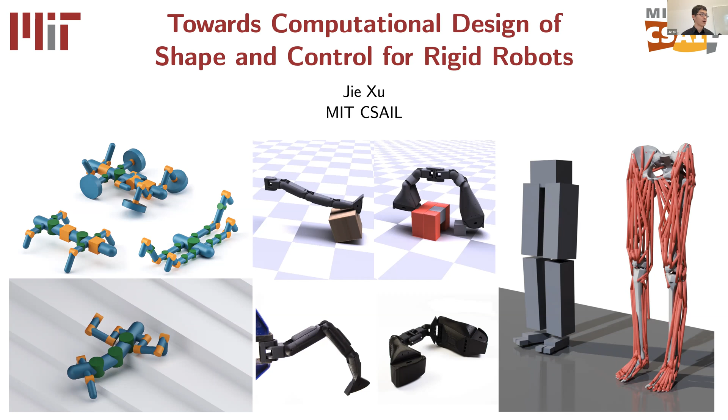So to motivate why we need to do some co-design of robots, let's first look at organisms in nature. Nature has evolved tons of creatures over tens of thousands of years to be so skillful for different tasks. To be successful in their special skills, every creature here has its own very special body mechanism to be able to complete different corresponding tasks easily.

And the same analogy happens to robots. Here are a few representative designs from terrestrial robots, manipulator robots, aerial vehicles, and underwater robots. It can be seen that those robot designs are very diverse and highly optimized for the specific tasks. Although a proper robot design is so crucial for task performance, designing and optimizing a robot is actually very, very challenging and time-consuming.

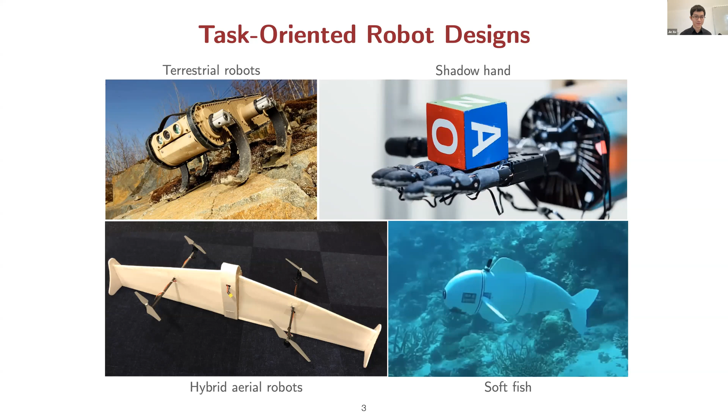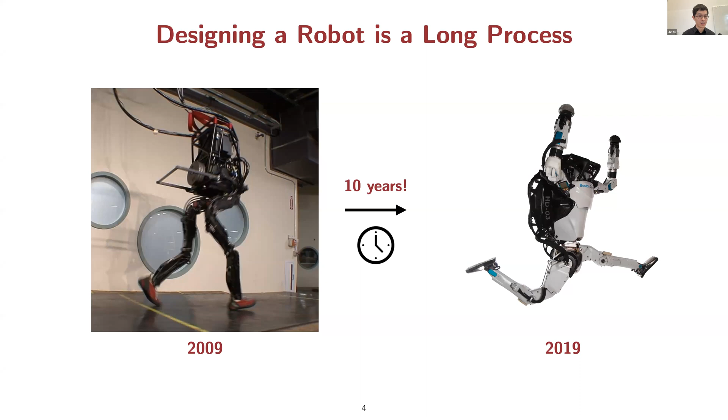For example, think of the Atlas humanoid robot from Boston Dynamics. It takes a genius team almost 10 years to evolve from the previous Petman version to the optimized Atlas model. So why is it so hard, and why does it take so long to evolve this model?

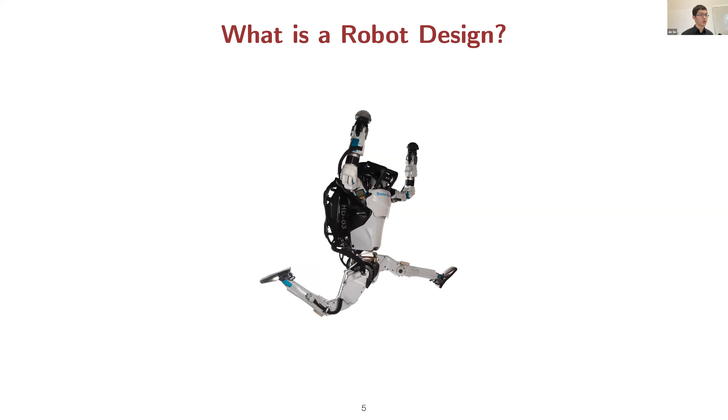So let's take a close look at what a robot design actually is. Or in other words, what are the components the designer should consider when designing a robot? Similar to nature's creatures, most robots are composed of two main components: the body and the brain. The brain is responsible for telling the robot how to make actions based on observations of the world. On the other side, the body is more complicated and corresponds to the robot hardware, including morphological shape, sensors, actuators, etc.

To simplify the problem a bit, in this thesis we consider the morphological shape as the main design variable in our robot co-design problems. However, even modeling the hardware shape only is complex enough. To specify the hardware shape, we need to decide on some discrete variables, such as the topology of the robot, the number of limbs, how those limbs connect to each other, and what type of joints are to be actuated. We also need to decide some continuous shape parameters, such as the size of each limb, the mass properties, and the frictional coefficients of each limb.

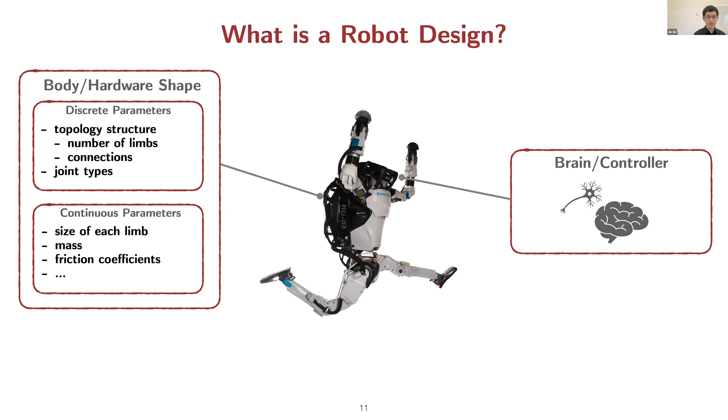So to design such a robot for given tasks, traditionally a robot expert needs to first empirically specify all of those shape and control variables.

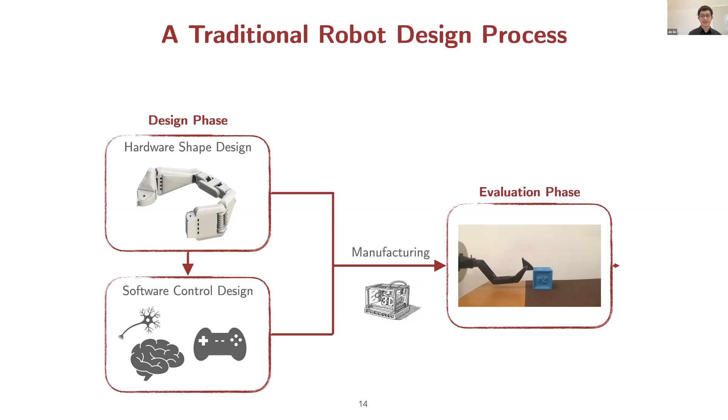Then it has to manufacture the design and evaluate the performance of the design in the real world. After that, based on the evaluation, she needs to come back to improve the design based on her personal experience. Each such manual design loop typically takes several days or even months.

A typical robot design process usually requires tens or even hundreds of such iterations before completion. Furthermore, the optimized robot design from this process highly relies on the expert's knowledge and can be limited by the expert's priors.

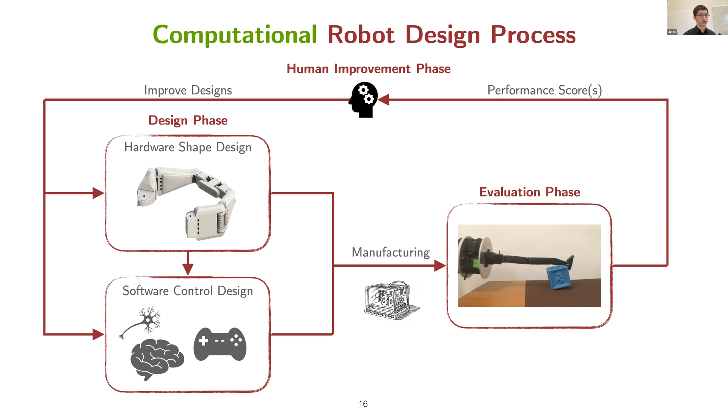Computational robot design tries to improve this process by minimizing human intervention in each stage. First, it replaces the manual design phase with a computational robot design representation so that we are able to numerically represent robots by a set of shape and control parameters.

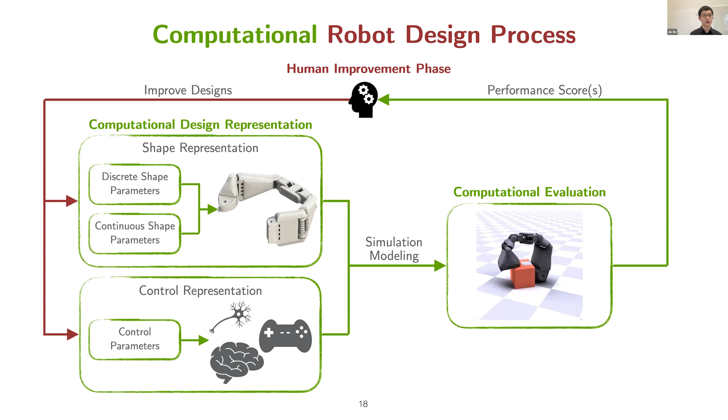Next, instead of manufacturing and evaluating the robot in real experiments, it computationally evaluates the robots inside digital simulators. And finally, and most importantly, the manual improvement phase will be replaced by a computational optimization algorithm to automatically improve the robot design parameters.

The replacement of these three stages successfully builds a fully automated and computational robot design process. To achieve this ultimate computational pipeline, we argue there are a few key challenges and several system design choices we have to tackle in each part.

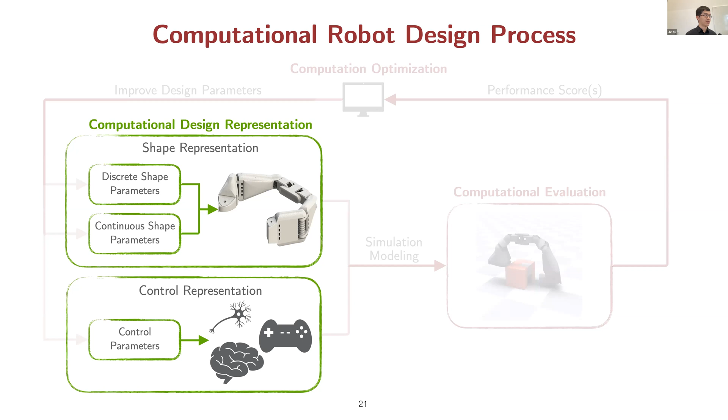Let's first start from the design representation part. The first question we encounter is: what's the best computational representation for the robot shape? Specifically, how to effectively represent the discrete topology, how to represent the continuous shape morphology, and how to represent both simultaneously are the very first challenges we have to deal with.

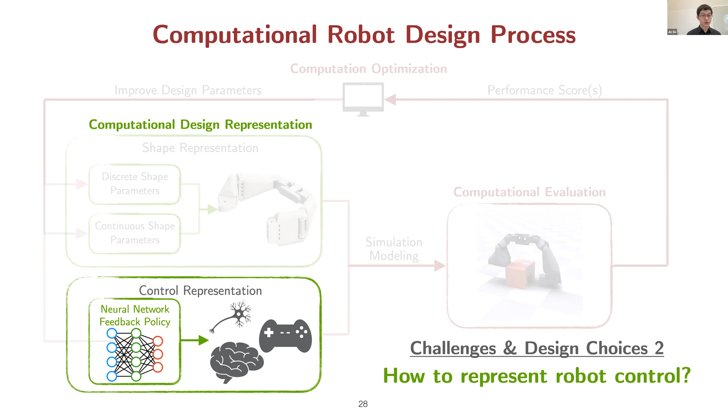The second design choice is how to represent the robot control. We have two options here as well: we can either use an open loop control sequence to represent the control, or use the more sophisticated neural network control policies as our control representation.

Next, in order to optimize for the robot designs, we need some performance metric to guide the optimization algorithms. An effective performance metric must reflect human subjective comparisons among different designs. We have two choices here as well: single objective metric or multi-objective metric.

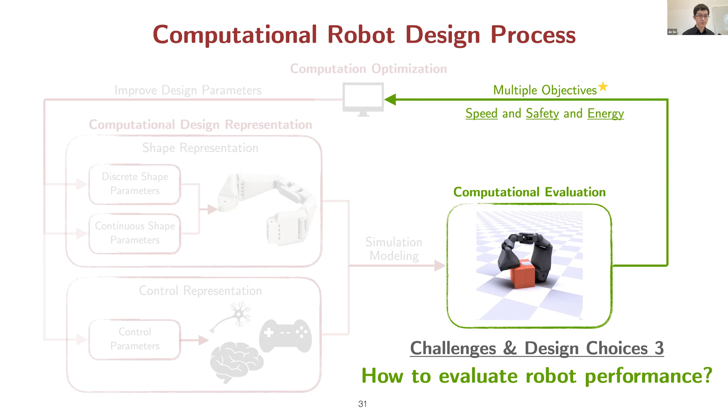While single objective representation is simple to start with, most tasks in the real world are evaluated by multiple criteria. Robots in real life are also usually optimized or designed for completing multiple different tasks instead of just one single task.

Once we have the proper robot representation and the task evaluation metric, the next and biggest challenge for us is how to optimize the robot design parameters to maximize its evaluation metric. There are a lot of interesting and challenging optimization problems to be solved here.

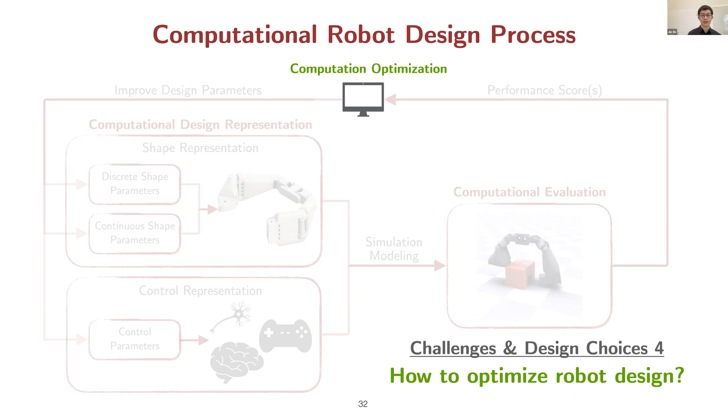First, within the single objective scope, we need to consider whether we want to just optimize for the robot control with the robot shape fixed, or improve the robot shape and control simultaneously. For the shape part, the optimization problem can also be very different depending on which parts of the robot shape are to be optimized.

And then all of those optimization problems happen again for the multi-objective case as well. As we can see, there are so many interesting challenges and problems throughout the whole computational robot design pipeline.

In my thesis, we try to contribute a small piece toward this ultimate goal by proposing our solutions to some key challenges we have identified here.

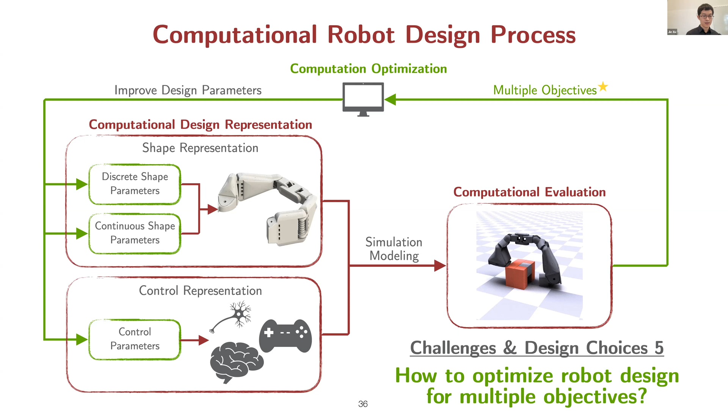In the first part of this presentation, I will introduce how we represent the discrete topology and the continuous morphology of a robot. Then in the second part, I will present in detail how we handle the single objective robot optimization for control problems with the fixed robot shape.

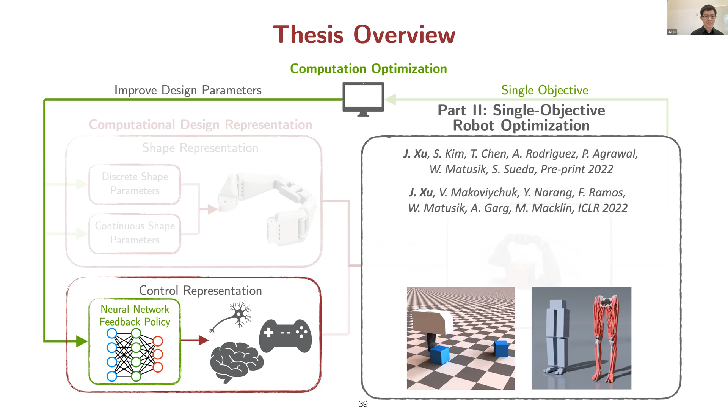And how we do the co-optimization for both the robot continuous shape parameters and the control, and how we further co-optimize for the robot discrete topology along with its control strategy. In the final part of this presentation, I'll briefly show our efforts on multi-objective robot optimization problems.

Okay, now let's get started for the first part, the robot shape representation. To computationally optimize the robots, the first problem we need to address is to represent a robot in a computational way. To be noted, I will probably use the words parameterization and representation interchangeably during my talk.

So what's a good robot shape representation? An ideal shape representation should result in a compact parameter set while also being able to express tons of different designs. It should also work for articulated robot designs with complex geometries, and it should always produce valid designs that can be easily manufactured. More importantly, the representation should be amenable to efficient optimization algorithms.

We propose different representations for robot discrete topology and continuous morphology, and I will take the manipulator design as an example to illustrate our solutions. So I'll first present our continuous shape morphology representation with the topology of the manipulator fixed. This is part of our RSS 2021 paper.

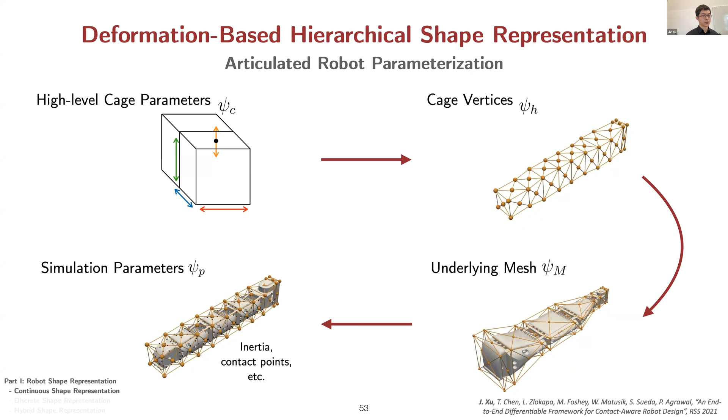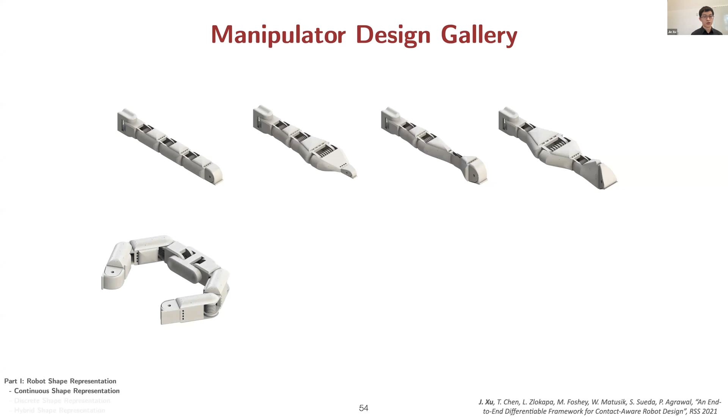Here we show two examples of applying our deformation-based representation. First is a single finger model, shown here in its rest shape. We parameterize it with our approach and randomly sample the cage parameters to produce several variations of it. As we can see, the generated designs successfully keep the connectivity while also preserving the geometry feature of the design. Here is another example, a two-finger robot manipulator, with its variations produced by our parameterization. We further validate the manufacturability of the produced designs by 3D printing each component and assembling them together.

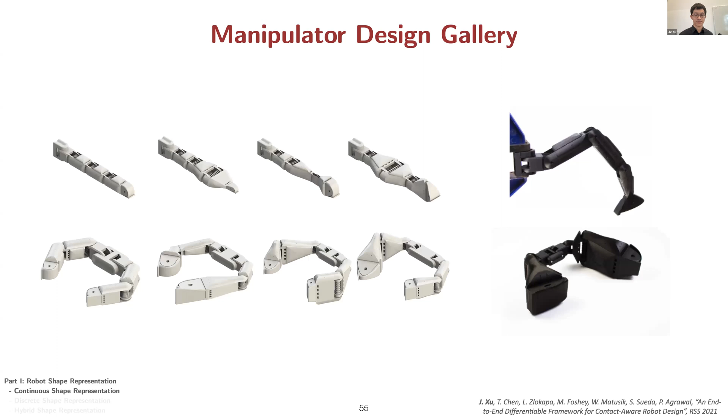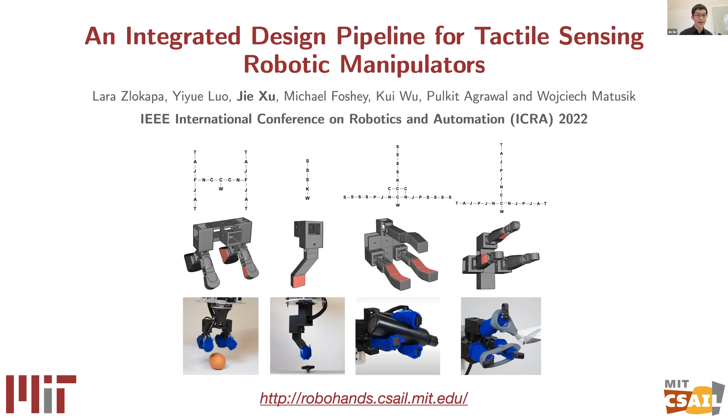Now that we have shown our representation for continuous shape parameters, next I will present how we represent the discrete topology of a robot. This is part of our work presented at this year's ICRA. With our approach, we are able to generate many different and valid manipulator designs very easily, and our approach starts with using a graph representation for each robot's topological structure.

Simply speaking, we can convert any robot structure into a graph. Each graph node here corresponds to a component of the robot, and each graph edge corresponds to a physical connection between two adjacent robot components.

While we can easily convert a robot structure into a graph, the reverse conversion is not necessarily valid. This is because if we arbitrarily construct a graph, it can result in an invalid design. For example, two adjacent graph nodes might not be physically compatible for connection in the real world. Thus, we cannot directly treat the graph as our representation for the optimization problem, since the optimized graph might be an invalid robot design. Therefore, it requires us to further invent ways to constrain the graph space to be valid.

And we achieve this by graph grammar. Specifically, a graph grammar includes a set of robot graph generation rules. Each rule either expands a non-terminal assembly node into a subgraph or replaces a non-terminal node with a realizable part to finalize the design. And the grammar rules are built in a way to satisfy the manufacturing constraints.

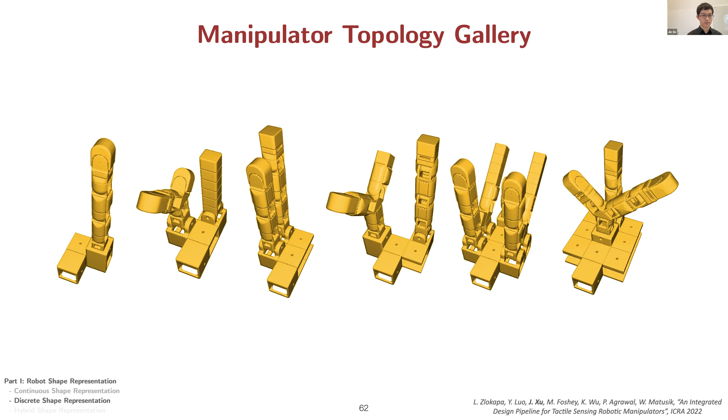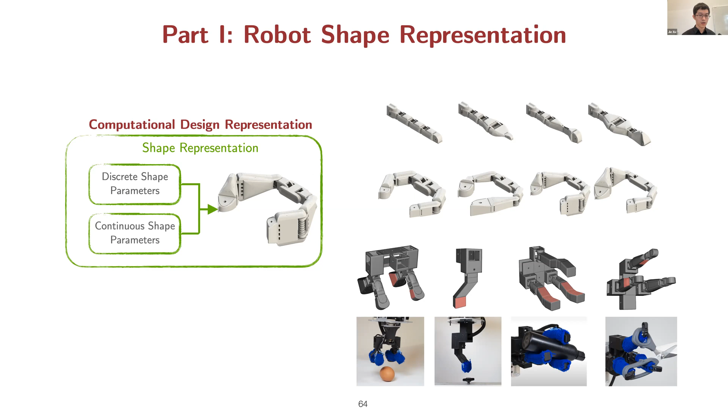We have shown how to represent the continuous shape parameters and how to represent the discrete shape topology of a robot. Now, if we combine these two representations together, we can successfully represent any discrete and continuous part of a robot shape. Specifically, we built a two-stage hybrid representation for robot design.

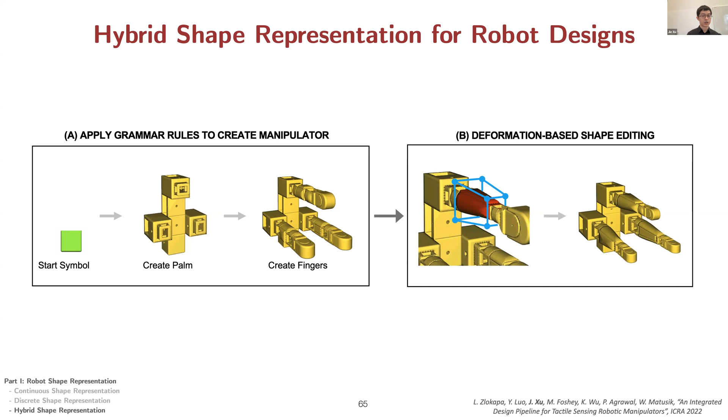In the first stage, the graph grammar rules are applied to construct the topological structure of the robot. Once the topology is determined for the manipulator, the representation process then enters the second stage, where the deformation-based representation works to determine the continuous morphology of each manipulator component. Here is an example.

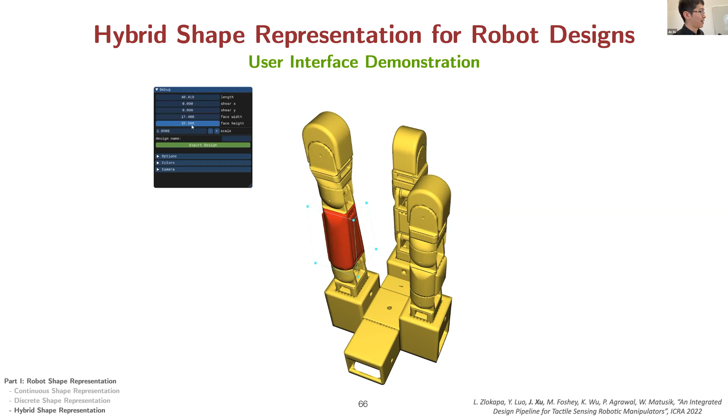We built a manipulator user design interface to demonstrate our hybrid representation. It will start from the palm grammar to construct some palm structure. Then once it's finished, it goes to the finger grammar to apply some rules to generate the finger structures and topologies. Once the whole topology of the hand is finished, we enter the deformation-based representation part to change the morphology shape of each individual component by cage-based deformation. So that's the whole process of how we build a manipulator from our interface and our representation.

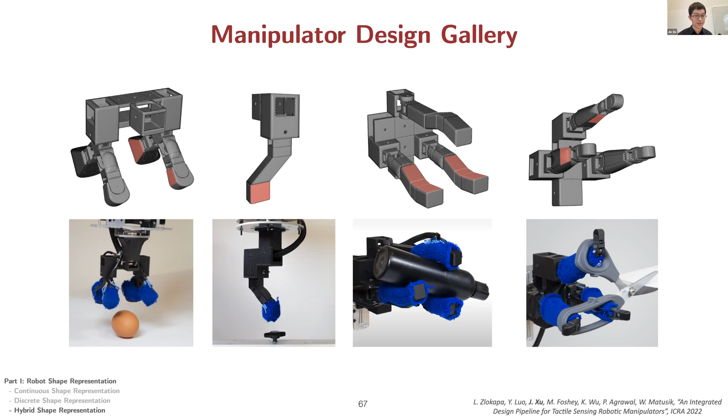Here are some manipulator designs built from our user interface, and all of them can be successfully manufactured and perform tasks in the real world. The blue covers here are knitted tactile sensors we put onto the manipulators.

In summary, to represent the shape of a robot, we use a sequence of grammar rules to parameterize its discrete topology, and then we use a set of cage parameters to parameterize its continuous shape morphology. Now we have our computational representation of our robots. The next question is how to leverage those representations to do robot optimization.

We will first focus on the single objective robot optimization problems. To optimize a robot, we have different options. We can either optimize its control only, as most robotics people do, or we can co-optimize its shape and control together. We will first delve into the problem of control optimization with the topology and morphology of the design fixed. Specifically, given a task and the fixed robot topology and morphology, we are interested in how to optimize a neural network control policy for this robot, for the given task.

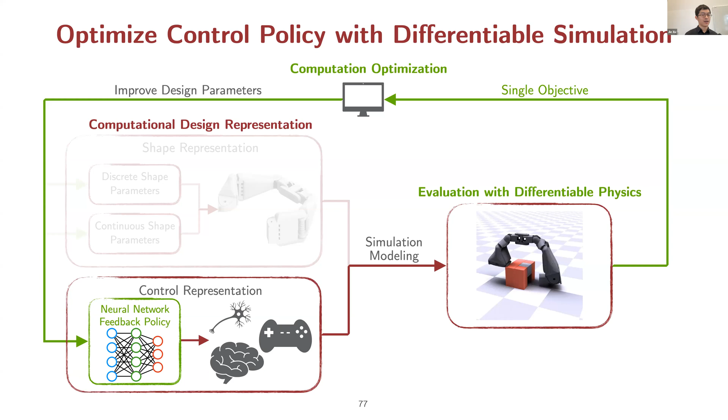As we know, reinforcement learning has shown to be a very successful tool for policy learning on many complex problems, such as in-hand manipulation tasks and humanoid character control tasks. However, reinforcement learning typically requires large amounts of samples, especially for high-dimensional problems, and it makes the learning very expensive and time-consuming. In this thesis, we argue that a differentiable physics simulation can significantly help improve the learning efficiency of the control policies. So what's a differentiable physics simulation?

Before talking about the differentiable simulation, let's first talk about what is a simulation.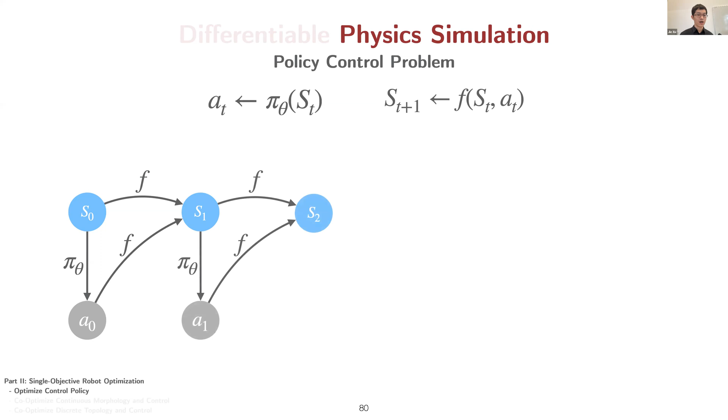Once the policy generates the action command, the simulator will execute this action and predict the new robot state according to the physics law. The simulation and the policy repeat this process for each time step until it reaches the end of the task. Then a task-related objective function is defined as a function of the states and actions to evaluate the performance of the policy. Our goal is to optimize the policy parameter theta to minimize or maximize this policy loss function.

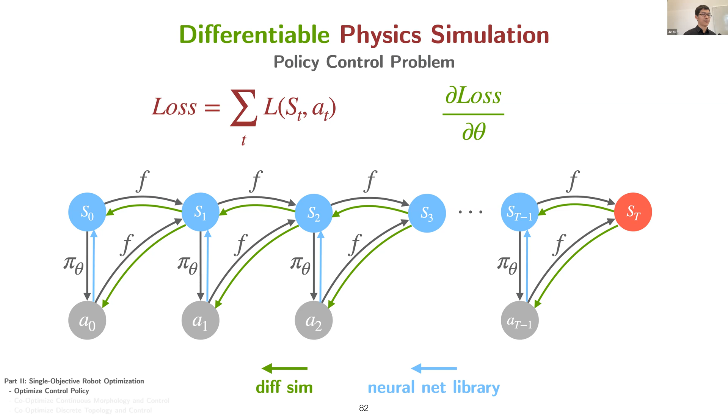That's what we typically do with a traditional physics simulation. A differentiable physics simulation will not only do this forward simulation path, but also compute the backward gradients. Specifically, it can pass backward the gradients of each simulation step throughout the whole trajectory and obtain the analytical gradients of the objective loss with respect to the policy parameters. You can think of each simulation step F as a layer of a neural network where the gradient function is customized by our differentiable physics simulation. Once we have partial loss, partial theta computed, we can apply any numerical gradient-based optimizer to optimize for the policy parameter theta.

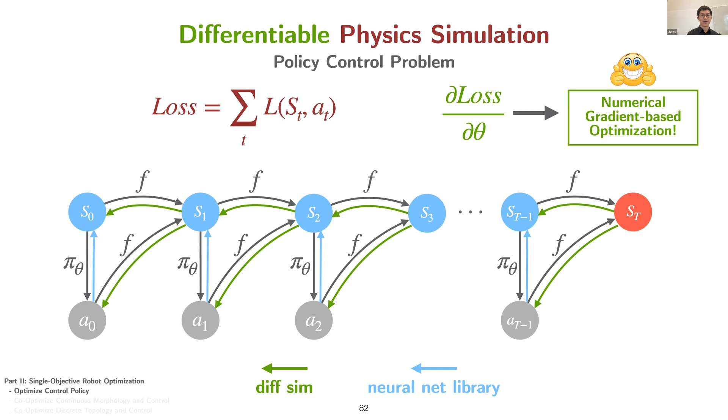In this task, a WSG50 gripper is equipped with a GelSlim sensor at the fingertip, and the task of the gripper is to push the box to a random goal location and orientation. To increase the difficulty, the box location is randomly initialized, and a random external force is applied to the box at each time step. The input observation of the policy includes the state information of the gripper, the goal location and orientation of the box, and the tactile sensor readings. Note that no box state information is observed by the policy.

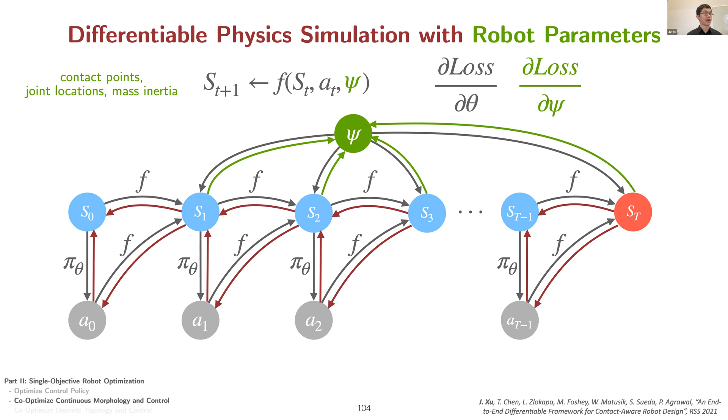Similarly, when deriving the simulation gradients, we can derive the gradients of the objective loss with respect to both the control parameters as well as the robot physics parameters. The computed gradients can then assist us to optimize the robot shape with gradient-based optimization easily. So with this high-level idea, let's go into this diagram again.

Suppose now we have a differentiable physics simulation with gradients to all the robot physics parameters and control parameters. We still have one thing missing: the differentiable conversion from the shape parameters in the optimization to those simulation-related robot physics parameters. Fortunately, that's exactly the continuous shape morphology representation we discussed earlier in this presentation.

Here we build an end-to-end differentiable framework for robot co-design. Given a fixed robot topology, the framework starts with a hierarchical deformation-based parameterization for the robot morphology. We use a set of high-level cage parameters to control all the simulation-related kinematics and dynamics parameters of the robots. Then the differentiable simulation takes the control parameters and the converted simulation parameters as input and evaluates the performance. The differentiability of each step allows us to backpropagate the gradients of the loss through the whole pipeline to the morphology and control parameters, enabling efficient gradient-based optimization for robot co-design.

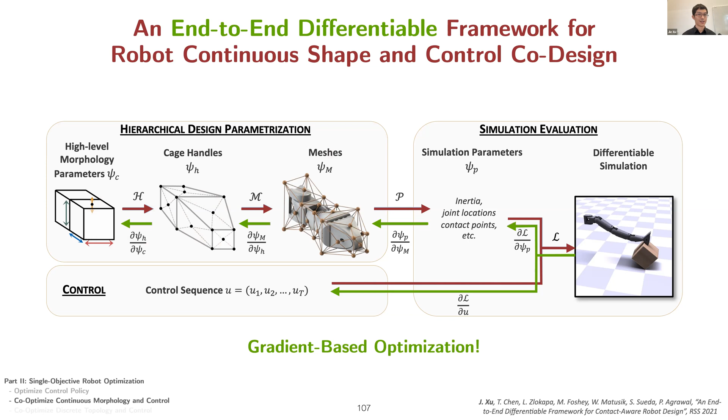We test the efficiency of our framework on 4 co-design tasks: the finger reach, the flip box, rotate cube, and assemble task. I'll introduce 2 of them here in detail.

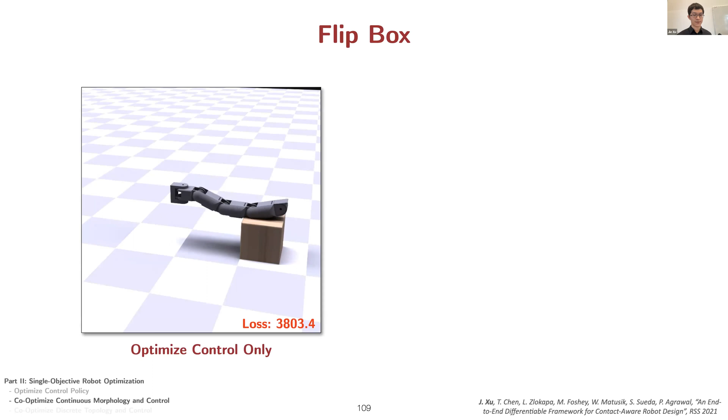In the first task, the finger is required to flip a heavy box. The video on the left shows that it's insufficient to only optimize for control. By co-optimizing the shape and control together, an interesting hook-like structure evolves to hook onto the back surface of the box to flip it over more easily.

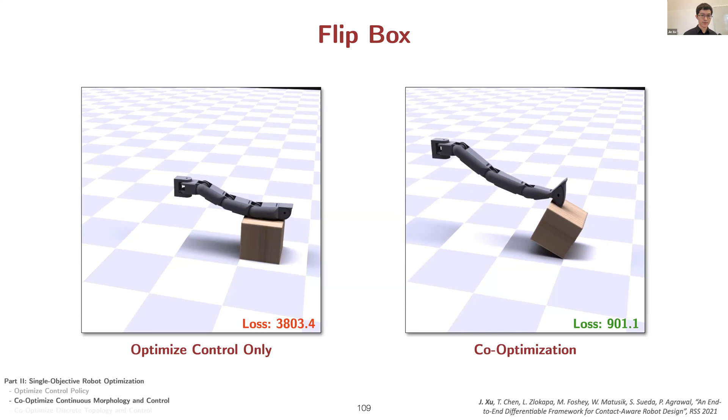We compare our method to gradient-free methods such as CMA-ES, 1+1-ES, and a reinforcement learning-based approach. The results show that our method is able to find better morphology and control combinations while only using 10 to 20 times fewer simulation iterations.

The next task requires 2 fingers to collaborate together to accomplish an assembling job. The optimized morphology has a longer right finger and shorter left finger to be able to reach the 2 objects of different sizes. Furthermore, the large and flat fingertip helps to push the cube more stably than a thin and curved fingertip.

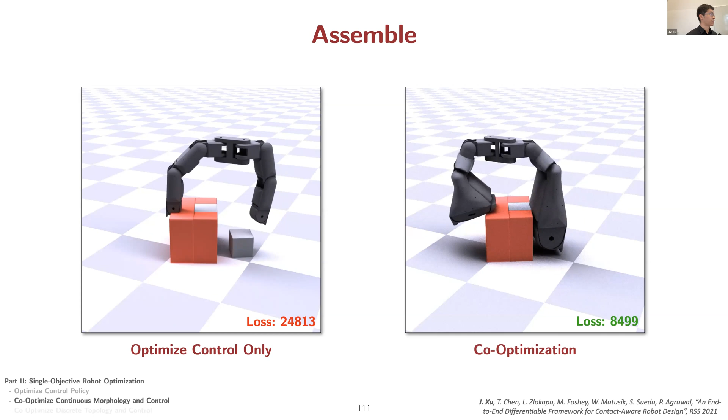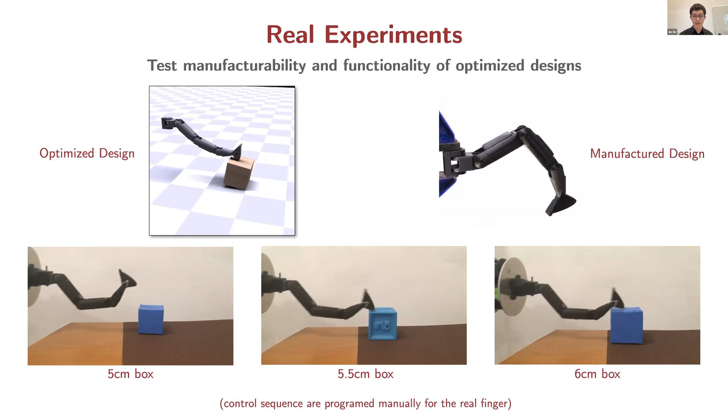We further test the manufacturability and functionality of the optimized design for the flipping box task in real-world experiments. We conducted stress tests on cubes of different sizes to test its functionality and robustness, and the experiment shows that the manufactured fingers can successfully flip the cubes in the real world.

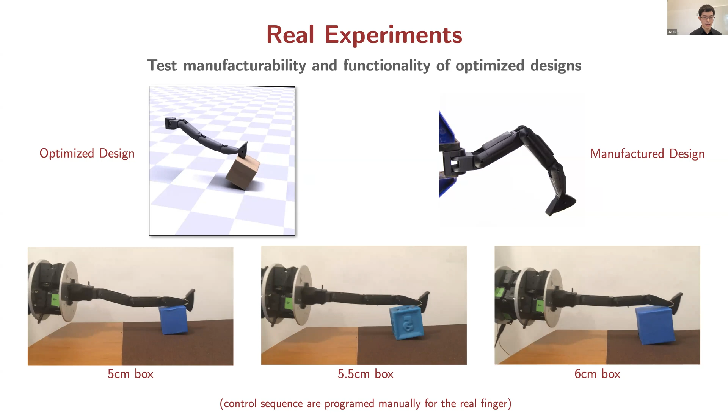In conclusion, in this work we present a numerical optimization method for co-designing the continuous shape parameters and control of a robot. This numerical optimization is computationally efficient since it highly exploits the underlying parameterization and dynamics model provided by our end-to-end differentiable framework.

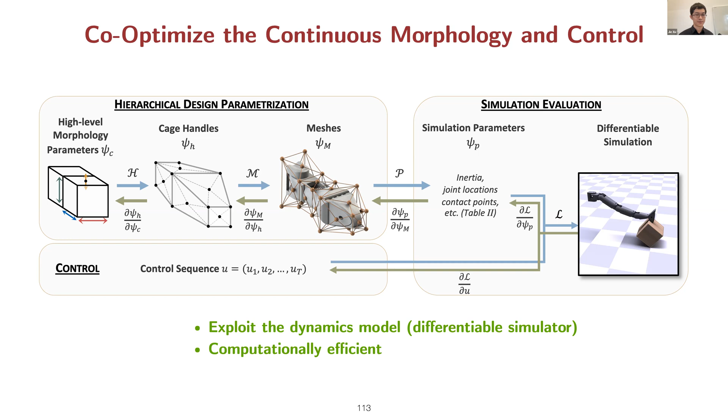We have now shown that differentiable physics simulation can help us co-optimize the control parameters and continuous shape parameters. But how about for discrete shape parameters?

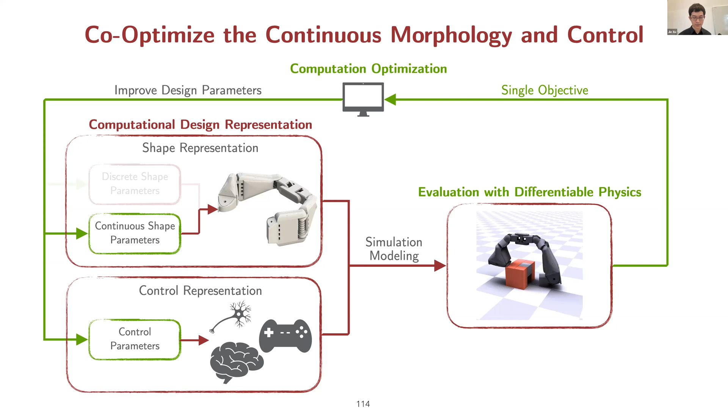Unfortunately, the inherent limitation of the numerical gradient-based approach is that it requires the optimization variables to be continuous. A simple illustrative example is that if we change the topology of the manipulator, the number of control degrees of freedom changes, so we can no longer have a fixed number of control variables to be optimized by our optimizer.

Next, let me show how we solve this challenging discrete optimization problem by leveraging some machine learning techniques. Our algorithm is part of the work presented in SIGGRAPH Asia 2020, and we use the terrestrial robot design problem as an example to demonstrate our method.

In this task, we use a graph grammar-based representation I introduced earlier. To recap: we use a graph to represent each terrestrial robot design, where each graph node corresponds to a component and each graph edge corresponds to a physical connection between two components. We use graph grammar to represent the valid robot design space, and starting from a non-terminal node, we can apply different grammar rule sequences to obtain different valid robot designs.

However, the grammar design space provides an extremely large combinatorial search space for the searching algorithm, making it very challenging to invent an algorithm for it. So how do we do the search? To illustrate the high-level idea, let's first take a look at the grammar search space. For simplicity, we can think of the search space as a tree-like structure, where each dashed node inside the tree represents a partial design, and each leaf node represents a final complete design.

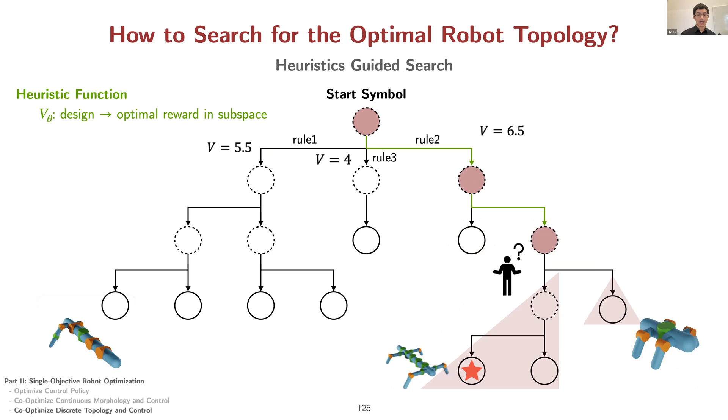That's the highest score among the 3 applicable rules at the first step, so we select rule 2 at this step, and then we follow the heuristic function again in each step until we reach the optimal leaf node.

So that's the high-level idea. Based on this high-level idea, we introduced our graph heuristic search algorithm here.

In each iteration, the algorithm starts from the design phase. In this phase, the algorithm tries to search for the optimal robot design in the grammar space, and at each step it uses a learned heuristic function to predict the value of each branch.

The heuristic function is modeled by a graph neural network, which takes a complete or incomplete design as input and predicts the values, and predicts the best optimal design in the selected sub-branch in this search space.

The searching direction is then guided by the predicted value of the graph grammar, and it runs in an epsilon-greedy strategy, going from top to down until we find a final design.

After sampling a design, the algorithm enters the evaluation phase to evaluate the performance of the sampled robots in simulation through model predictive control.

The design and its performance score are added to the design buffer. Finally, this loop concludes with a learning phase to improve the heuristic function from the collected data in the design buffer, using all the data to improve our heuristic function in each iteration.

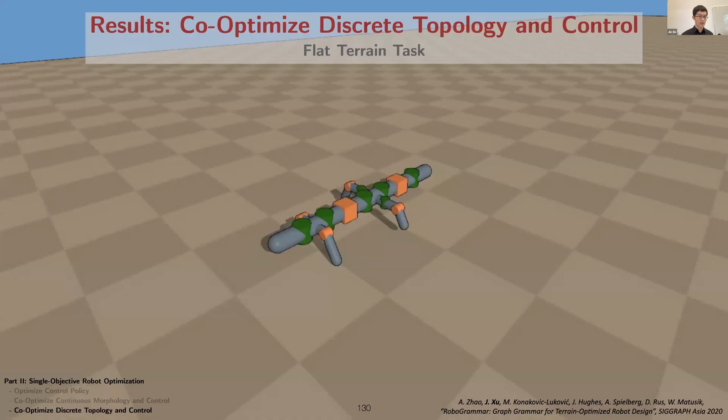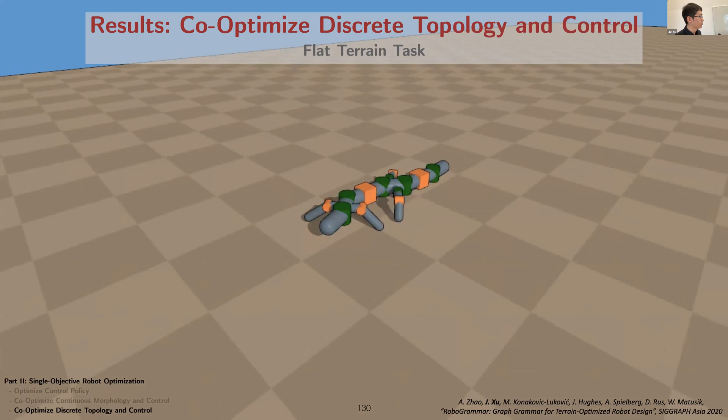Now let's see some cool results. Here is a robot optimized for the flat terrain task. In this task, one successful strategy is to place the limbs far from each other on the body and give them a full range of motion to move it very fast forward.

Here is the robot optimized for the climbing task, to climb a stair terrain. The optimal design has two strong front legs to help it climb easily.

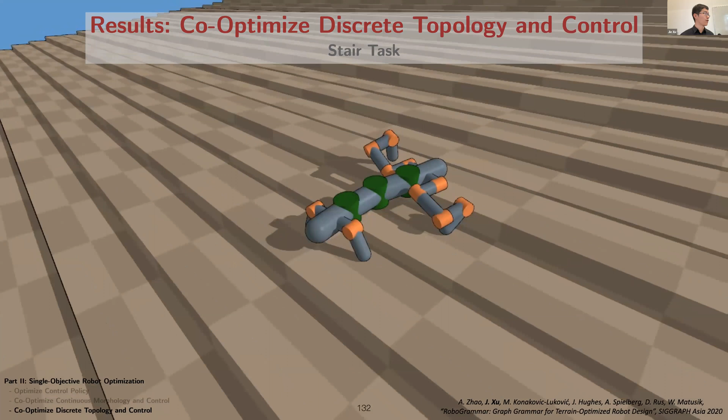There was no prior input to this search algorithm.

The secret sauce behind the graph heuristic search is twofold. First, we leverage the generalizability of the learned heuristic function to generalize the information we collected from the explored branch to predict the performance of the unexplored branch.

Second, as the search proceeds, the searching algorithm samples more and more designs, which helps us refine the graph heuristic function better.

And in turn, the improved graph search, the improved heuristic function helps the searching algorithm find better designs. So these two parts actually improve each other iteratively in each iteration.

Okay, so we have discussed our techniques for solving the single objective robot optimization problems. Now let's move on to the problems with multiple objectives. Due to time limit, I will very briefly introduce our high-level ideas of each project and demonstrate the experimental results. And I'm happy to chat offline if you are interested in the more technical details.

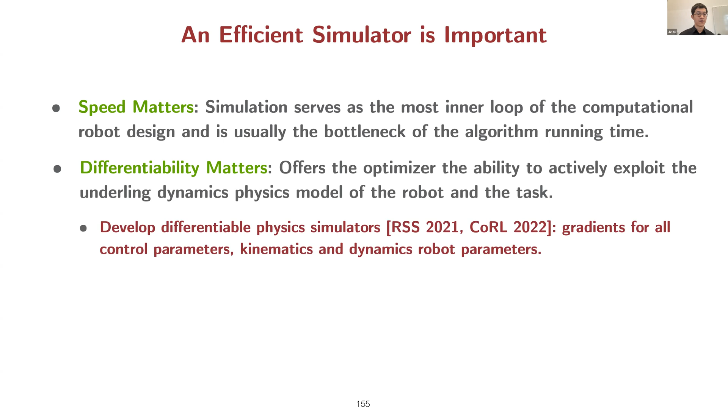Second, a good simulator can offer not only passive evaluation of the robot, but should also offer the ability to actively exploit the underlying dynamics model of the robot and the task. Inspired by this, we developed a differentiable physics simulator that can provide analytical gradients for all the robot control and physics parameters.

To achieve optimal performance of a robot, we can optimize different aspects of the robot design. For example, we can optimize only the control for robots, or co-optimize its continuous shape and control together, or we can also optimize the discrete shape topology and control strategy together. Different combinations require different optimization techniques.

We have demonstrated solutions for each of those combinations. A good takeaway from this thesis is that while numerical gradient-based optimizers can improve the optimization efficiency of continuous robot variables, learning-based approaches might become necessary when more complex and discrete variables are involved.

Although I have demonstrated algorithms for either optimizing control or co-optimizing robot shape and control, there is still a missing all-in-one optimization algorithm over all shape and control variables. Ideally, we should have a co-optimization algorithm to jointly optimize for discrete shape topology, continuous shape parameters, and feedback control policy for a robot in one pass.

We have some preliminary attempts along this direction. However, the current algorithms are only demonstrated on single rigid body systems without any contact with the environment. Those examples are drones and unmanned underwater vehicles.

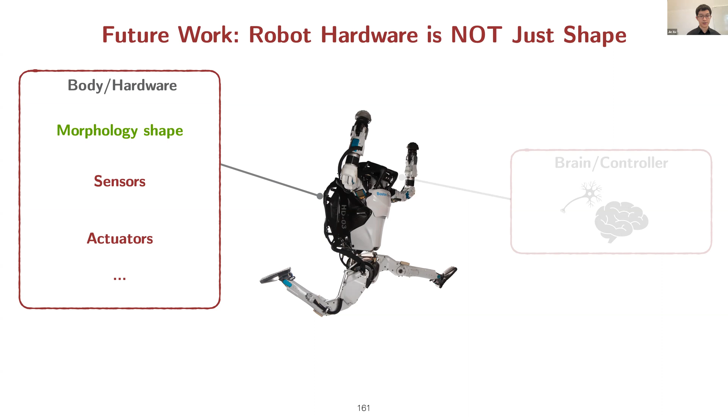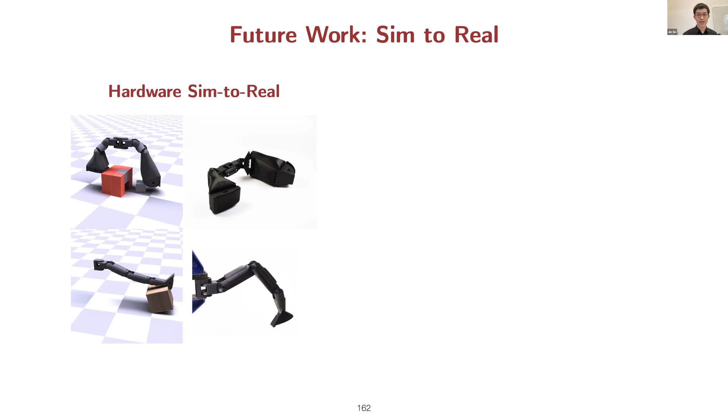Computational robot design cannot claim success without the success of sim-to-real. In my mind, there are two types of sim-to-real we need to satisfy. First is hardware sim-to-real, which means the optimized robot design must be able to be manufactured. We address this by effectively constraining the robot design space through proper robot design representations.

The second is control sim-to-real, which comes from the dynamics mismatch between the real world and simulation. There has been a lot of effort in the robotics field to narrow down this sim-to-real gap.

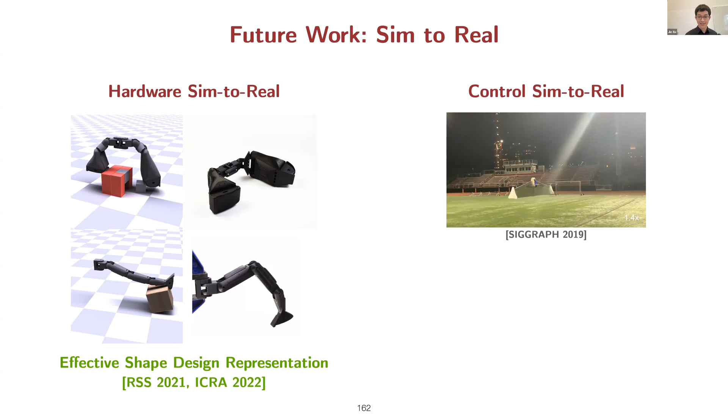I also had some preliminary attempts on sim-to-real for hybrid UAV, as mentioned by Wojtek before, and some attempts on sim-to-real for tactile-based manipulation control in a recent submission. However, the current techniques are still quite limited and highly problem-specific, and far from satisfying the needs of a general-purpose computational robot design pipeline.

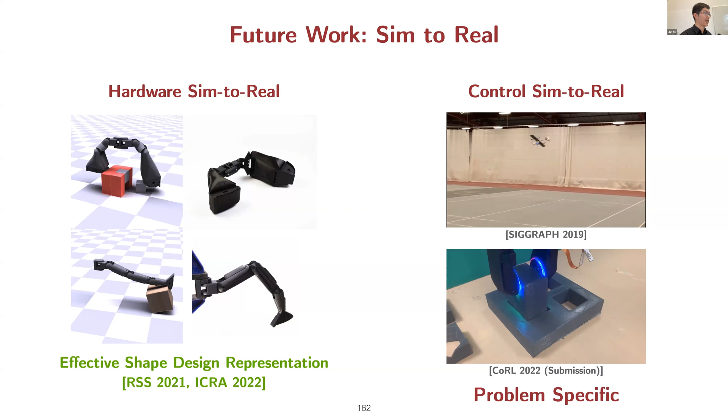So this concludes the technical part of my presentation.

Next, please allow me to spend a few minutes making some acknowledgements to the people who helped me during my PhD journey. First and foremost, I'd like to thank my advisor, Wojtek. Thank you for offering me this very special journey ticket to MIT and always encouraging me to conduct impactful research and to get distracted from those low-hanging fruits.

I also thank Wojtek for his extreme patience and tolerance in my very first leading project at MIT, which took me almost two years to complete. That was my first attempt to get into the robotics field, and I went through many different detours and failures in that project. Without Wojtek's patience and encouragement, I might have already given up and never knocked on the door of robotics again.

I would also like to thank the other professors on my thesis committee.

Many projects presented today could not have happened without help from Daniela and Pulkit. I thank Daniela for always sharing her broad knowledge and research view with us, and always encouraging us to keep excited, keep motivated, and keep pushing the projects forward. I would also like to thank Pulkit for providing his very professional advice from the perspective of a machine learning expert.